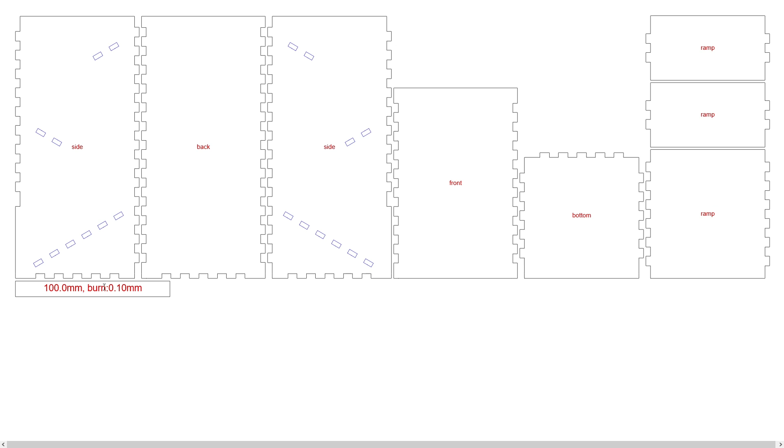Let me just generate this real quickly. That's this down here where it says 100mm burn 0.1. That's just for scale, don't need that. I will want to make a few slight setting changes here.

Let's first turn this off. Up here on the Dice Tower settings, where it says bottom, we don't want that bottom piece. Looking at the picture, it's basically what goes on the very bottom here. Really not needed — this particular deflector will hold everything together down at the bottom, so I think we should be good there. I'm going to go ahead and turn this off so we don't generate that piece.

The other change I want to make is down here for the corners. I don't want it to do a loop. For this particular one, I just want it to be a plain old corner, just a squared off corner. And then the burn correction, I'm going to set to 0.

If I made this a little bit bigger, it will make a tighter fit, and it literally says that here — bigger values for a tighter fit. This will be a little bit loose, but I'm going to glue it together, so I don't have to worry about banging and pounding like I've done with other boxes just to get things to fit together. This should be all I need.

Let's take a quick look at it. The finished product will look something like this. I'm going to do something with it, though — you'll see. Let's generate this.

Okay, get rid of this again. Thought I had that turned off. I do have that turned off. Why is it there? Oh, I turned the wrong one off.

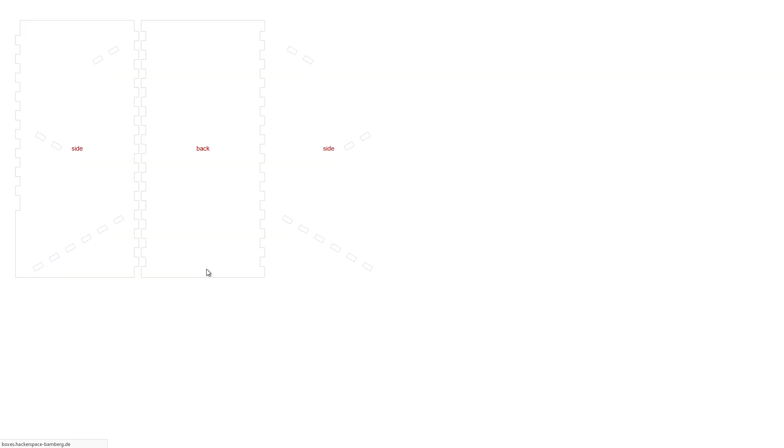Now let's take a look at it. That's what we want. So we've got the two different sides, we've got the back, we've got the front, and then we have the ramps or the deflectors. That's all we need, that's good.

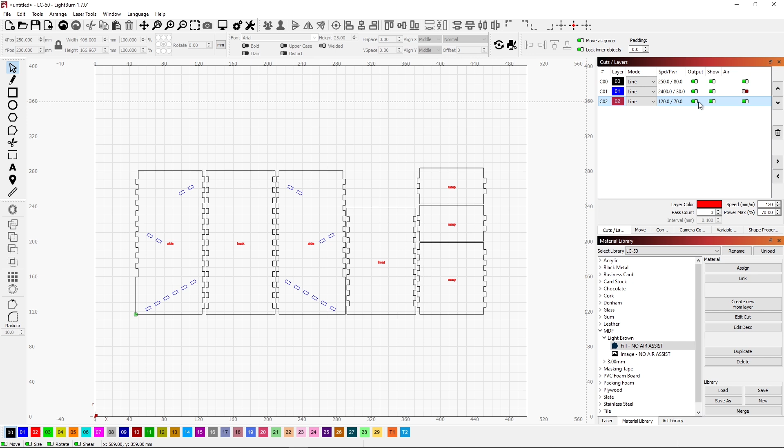I'll go ahead and download this, and then we can open it up in LightBurn. In LightBurn, this is how it opens up. Let's just change a couple things real quickly. I want to turn everything to line for now. We will not be outputting the name, so I'll go ahead and shut that off now so I don't forget. But this is basically what it's going to look like.

I have some graphics that I want to put on here, and to get everything to line up the way I want, I need to move these pieces around. The sides can be where they are, sort of, except they're kind of backwards. So I need to move some stuff around.

I'll go ahead and select this. I'll move it up out of the way for now, doesn't matter where. Grab these two pieces. Grab this piece — bear with me while I move some stuff around.

A new feature within LightBurn is to actually show what type of selection you're doing. In LightBurn, when you select from the left to the right, you'll notice we have a red square, and the only things that get selected are objects that are 100% inside of that rectangle. So if I select this, I should only get one thing selected. And it didn't even get that. Was it not in my rectangle?

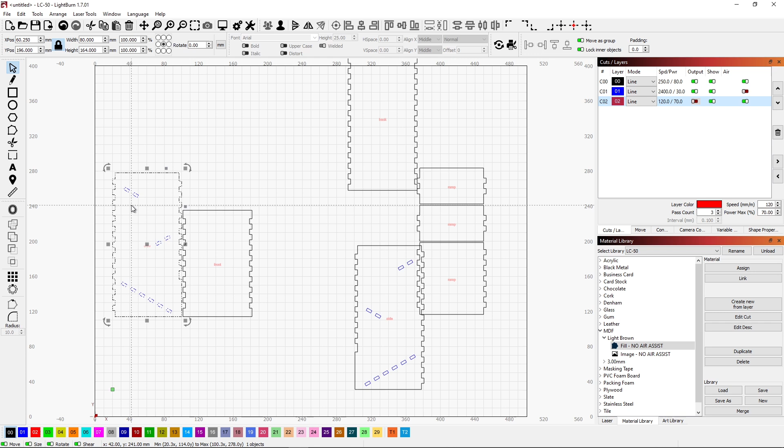No, it wasn't, because this whole object is grouped together. So the whole object wasn't in my rectangle, therefore it doesn't get selected. But if I come down like this, I'll get just this side. When you select from the right to the left, you'll notice the box is green, and this will select any object that's partially in your selection area. So that's just something to keep in mind, and it's a new visual so you can see what you're doing, which way you're selecting.

That's a new feature. I believe that came in 1.7, so relatively new.

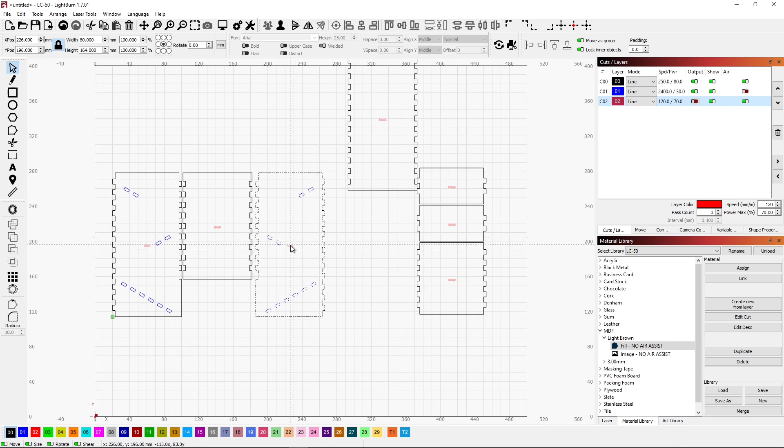I also want to have this piece. This is the front piece. I want it aligned with the top, for reasons I will get to. We'll get that aligned to the top, and then we have our other side. So let's grab that. We'll want that over here. We'll want to align that to the top of this whole thing as well. And then the back - doesn't really matter, I guess, but we'll just get that aligned. Have everything aligned on the top, so everything is all set there.

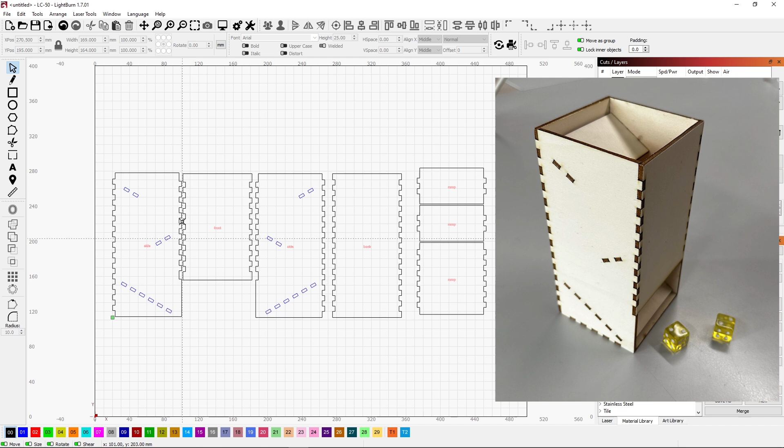What I want to do is I want to put an image. I want to put an image of a face or a dragon on here. And the reason for that, this is the mouth where the dice come out. You drop it in the top, and it'll go through this side deflector, then this one, and then the big one, which is here, or they call them in a ramp, and then they'll roll out. What I want to do is have a picture of a dragon where the mouth is this opening.

Let me grab that image. Let's go to the art library and bring that up. So we go into our dragons. Yeah, let's see, where is it? Here it is. We've used this dragon before. Bring it on here - a little bit big. To be able to see everything properly, I'm going to put that up at the top of my list. Everything else is on top of it. So I'll want to size this down just a little bit so that it fits the way I want.

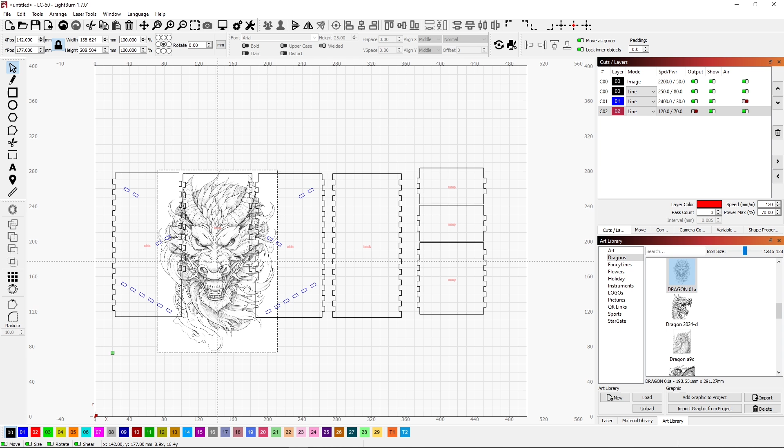So basically I want the mouth kind of like that. So the mouth ends right here at the end of this front piece. And then this part of the mouth won't get printed. But I do want to print the rest of that mouth, and I want to print it on this ramp that'll be inside of here. So when you look straight onto this, you'll kind of see the whole dragon. You'll see this part of the face, and then if you look in, we'll see some of this. It'll be slanted back, a little askew, but it'll still look kind of cool.

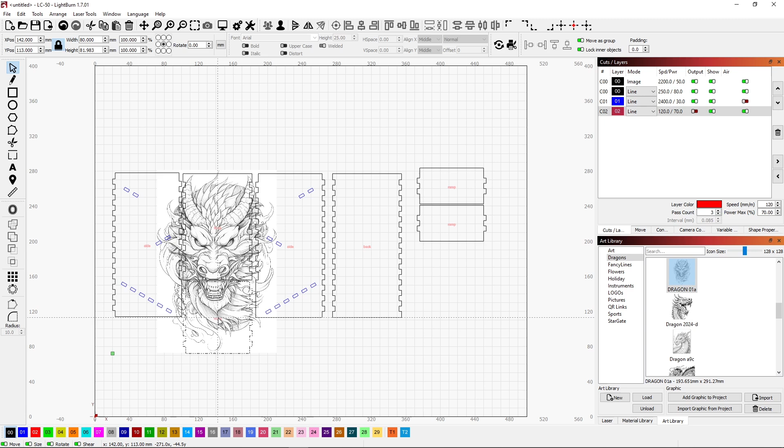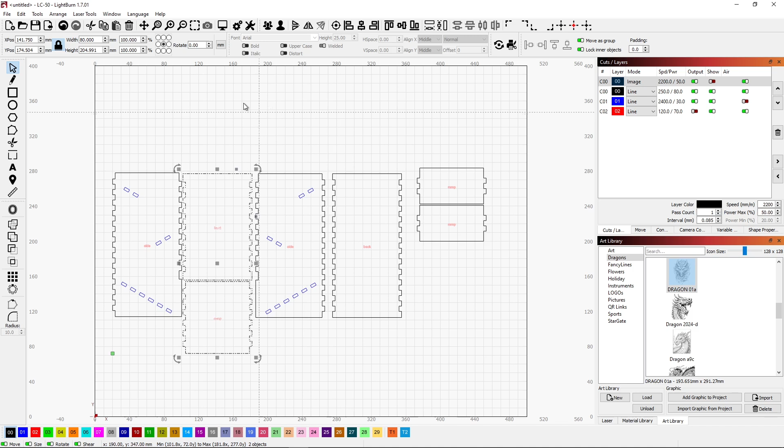So we'll want to bring this piece over here, and we'll zoom in on that so we can see that a little bit better. Let's get that to align properly. Hold on a second. Let's just not show the dragon for a second. So I want this to align on the right side of that. Okay, got it pretty close. We zoom in here. I also want to move this up so it's nice and tight.

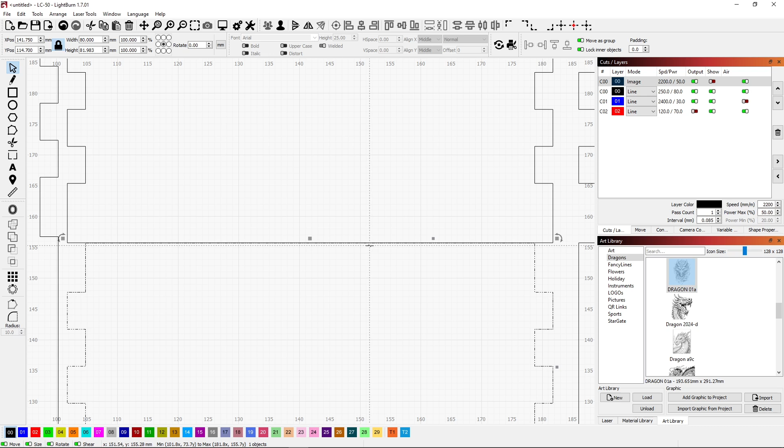If I do nothing, it moves, I believe, 5 millimeters at a time. If I hold control, it moves 1 millimeter. And if I hold the control and the shift, then it moves small amounts. I want those two basically butted up against each other. It doesn't need to be exact.

So the intent is going to be something like this. This is going to take a lot of extra space that I don't want, so I'm going to lose this area down here and this area down here. So what I'm going to do is I'm going to select my image, right-click it, and say duplicate.

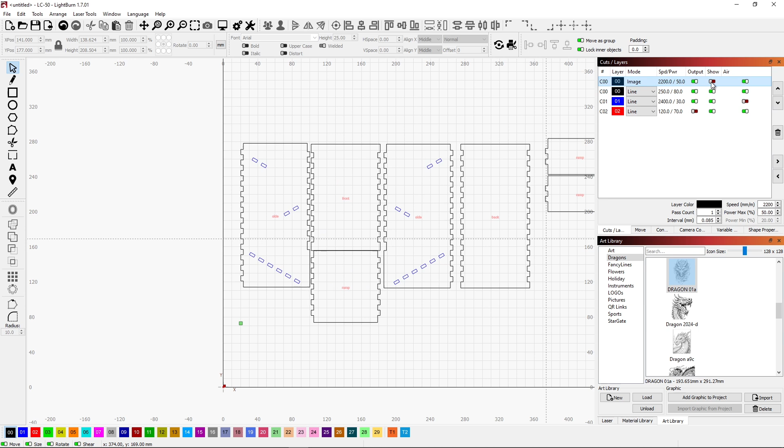All right, let's see if we can select. I got to turn that image off real quickly here. I want to select this piece. Turn my image back on. I'm going to hold the control key, hit select, so I have both of those. And I'm going to go ahead and just quickly group those together and move them off to the side for now. I'll get back to those later.

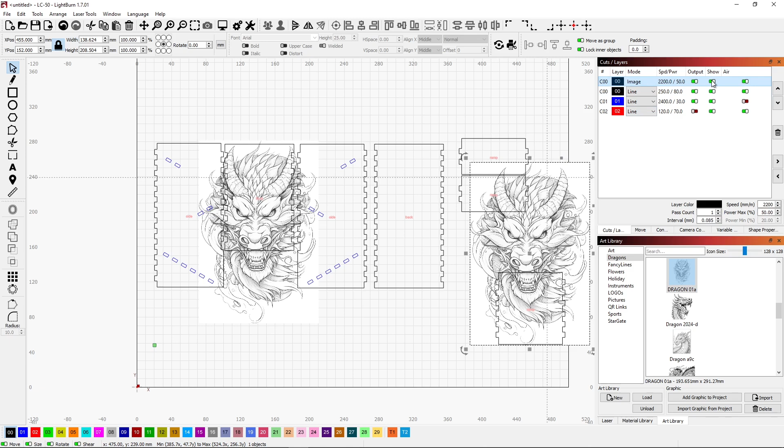Actually, I can go ahead and do them now. What I want to do is take this piece, and I have to ungroup it for what I want to do. I'm also going to have to ungroup this. I don't need the word ramp - it won't do what I need it to. Put that on. So we'll select the image. Turn that off real quickly. Do a control select here. Turn this back on.

I can right click and use apply mask. What will happen is only the part of that image behind my front ramp will be burned. That way I don't have to burn all this extra stuff, I can get just this part of the mouth. Okay, that looks really good.

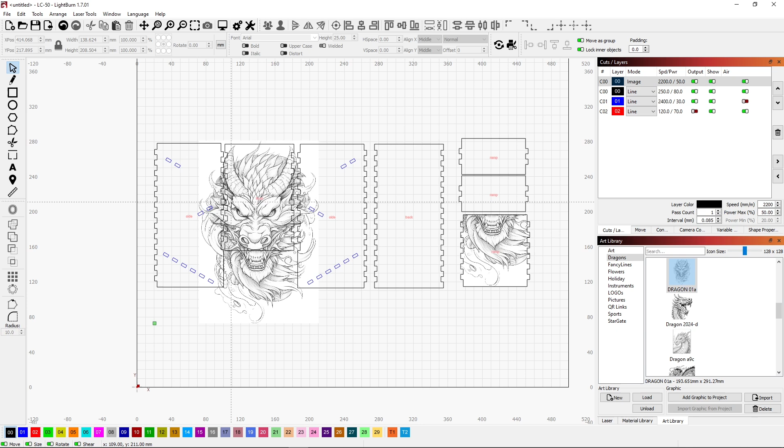Let's go ahead and get those name back on there and group this together. We'll get all this arranged properly later, I'm just going to set it there for now. Over here, if we zoom in just a little bit.

I want the dragon on the front piece. I thought it'd be really cool to have it wrap around the sides as well. What I'm going to need to do is change the gap so that there is essentially no gap.

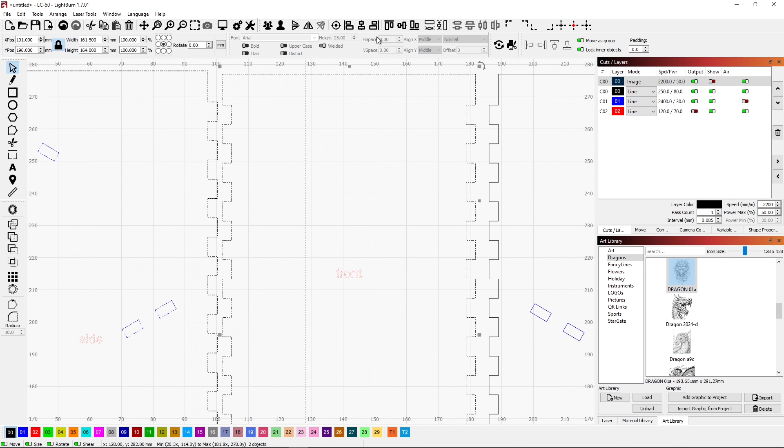If I zoom in here, let's turn this off. For some reason, why are you so much higher? I thought I aligned these already. Let's get those aligned on the top. There we go. And then we can go ahead and move this over. Boom, lined up, super nice.

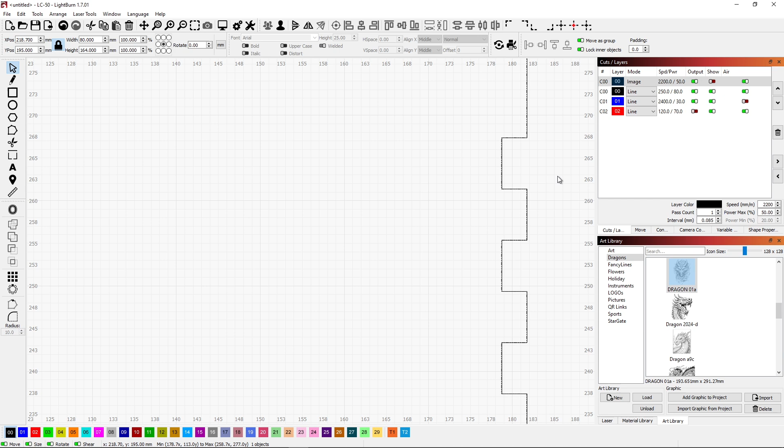And then we'll do the same thing over here. We'll get this piece and slide it over until it's right about on top of that. Doesn't need to be exact. This should work for now.

Okay, this piece, we could do the same thing. Why not? We'll see how that saves us a little bit of burning time. That moved over, okay, we can turn our image back on.

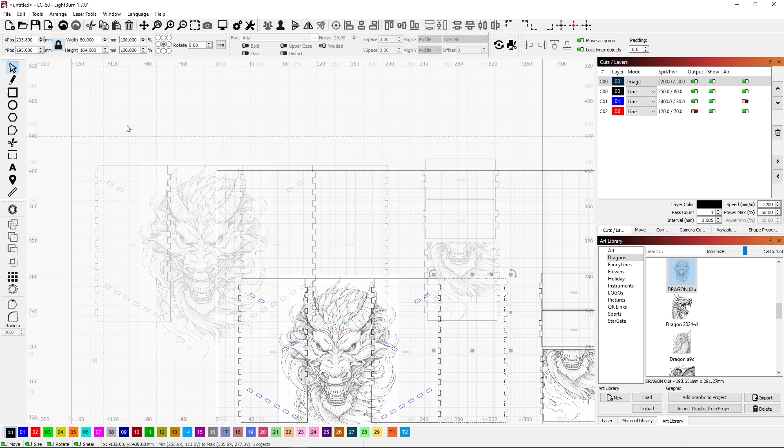So now we have these pieces all butted up against each other. The reason I did that is I can have the laser come down and burn this as one thing instead of having to burn it twice, so it'll save some time. We'll wait until later when I show you how I optimize this, how that's going to work.

These pieces, we'll wait a second on those. I'm still looking at this image. When we burn it, it's going to burn the whole thing, and we really don't need to burn all of this that's down here because there's no wood there that we're going to need, and that's going to be wasted time.

But what I want to do is a mask. Unfortunately, I cannot select multiple items to be the mask, it has to be one thing. So I'm going to make a new mask.

I'm going to make a rectangle, and I'll have that rectangle start on this line and come down to be on top of that line. I'm going to put it on a construction layer. It doesn't really matter how wide it is for our mask. That'll get rid of the stuff down here on the bottom and the little tiny bit sticking above the top. The other thing I want to do is get rid of this part out here.

So I need to add another rectangle. Make sure we're still selected here. We'll zoom in so we can see this. When I get close to that corner, I'll click there, and when I come down to this corner, I'll let go. And we can turn everything else off so we can see our mask and our image.

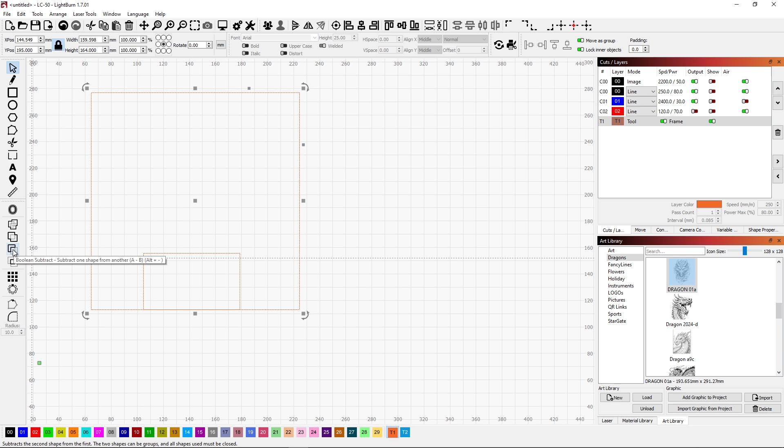Did I not get it selected? Hang on. All right, so what I want to do is select this main thing, Shift Select the small rectangle, and then subtract it. Now we have this shape.

If I turn on my image again, this will work well as a mask. If I pick my image, Shift Select my mask area, and then apply that — okay, now we can see it's not doing any of the mouth, anything outside of that. This will save us a ton of time when we're doing the burn.

Go ahead and just turn everything back on so we can see what's going on here. So this all looks good, that should do exactly what we need. This is basically what we want to burn.

Let's do some optimizing on this. For the image, we go to our material under MDF, burn, fill, image, and we want to assign that to our image. Then to our exterior borders, we want our 3mm cut through, we'll assign that. The blue is also going to be a cut through, and just to make sure that happens first, I'm going to move it up — doesn't need to be quite that high.

First thing we'll do is the images. Then we'll do the blue, which is the interior cuts. Then the last thing that we do will be the black lines, which is our exterior profiles of all the pieces. Now let's do a quick preview.

All right, it's saying 1 hour and 49 minutes to burn everything. We can improve on this greatly. So that's basically, we'll call it an hour and 50 minutes.

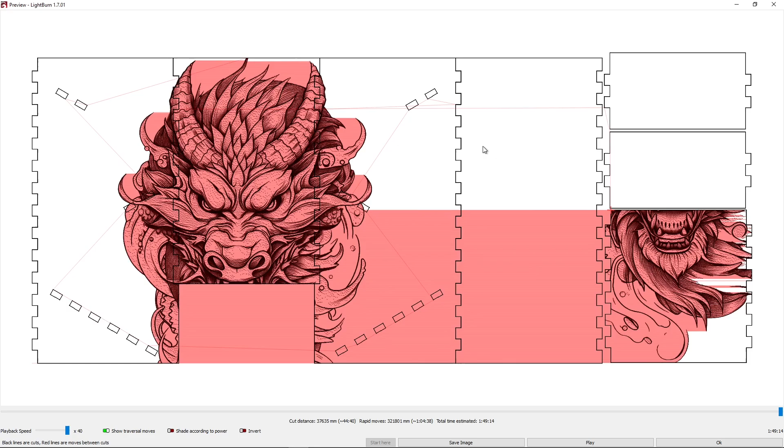Let's make some changes. The first thing I want to do is fix how it's burning or etching our image. It's basically scanning left and right, using 0 degrees. If I change this to 90, that's one change.

I'll also make sure that we're doing individual shapes so that we're not jumping back and forth between two shapes. What this will do is scan vertically, and since there's nothing to burn down here, it'll skip this area. Let's take a quick look at the preview and see what our savings is.

We were at 149, now we're at 132. So that's a savings of 17 minutes, just by changing the direction that it burns these images. That's a huge savings right there.

But there's more that we can save. So now we're at basically just over an hour and a half.

One thing that we can do is come into our option settings for optimizing. Down at the bottom of the list, we have an option called Remove Overlapping Lines. Remember, we put these pieces very close together so that these finger joints were essentially in the same spot. By turning this on, instead of burning these fingers for each piece, it'll only burn it once.

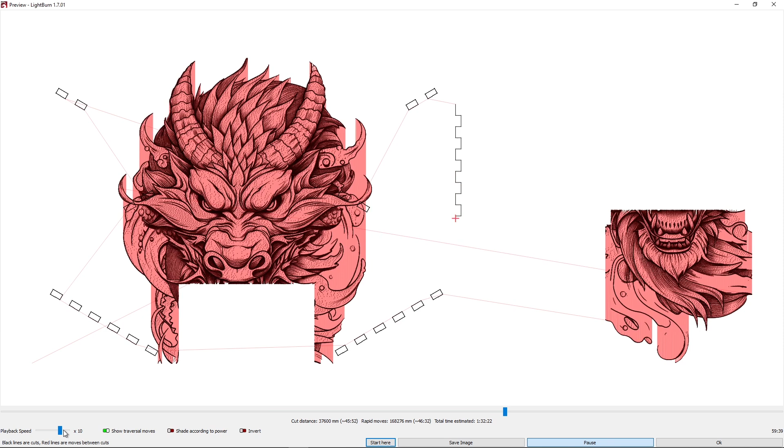Before we do that, let's take a look at how it currently burns that in our preview. Let's speed this up a little bit as we go. We see it's burning this shape, doing the external edge, and it's going to do it three times.

There's the second time around, and it's doing the entire part. Number 3 — when it does this next part, you'll notice it goes up the side and then comes down the middle. It's not supposed to do that.

Oh no, it is supposed to do that because we haven't turned this on yet. So it's burning in the middle here, burning all of this again. We don't need to burn that again, so that's wasted time. It's going to come over here, come down, come over here, and do these fingers again. Those are already burned because we butted those pieces up to each other.

When we come into our optimization settings and turn Remove Overlapping Lines on, we can set how far away they are to be considered overlapping. I'll use the default. Let's go back into our preview and see what it says.

So we've gone from 1:32 to 1:27 — 5 more minutes that we've taken off. So that's 22 minutes that we're saving so far.

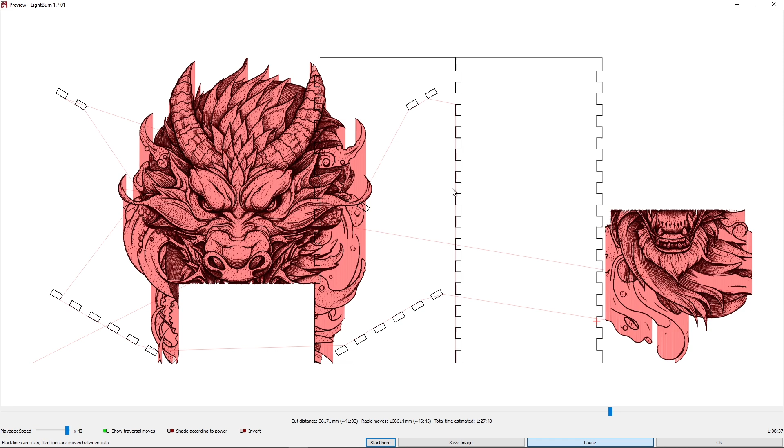We can see that when it burns — let's back our timeline up here — it's doing the outside edge. That's one pass. We're on the second pass, third pass. Now when it's doing this, it goes and it stops and it comes back, so it doesn't repeat the burning here. That's where we're getting our savings. So we've saved ourselves 22 minutes on this.

We're about at an hour and a half for burning this whole thing. This looks really good. What I do want to do is add a few more graphics on here — I want to put some images on the back, and I'll put some little images on the side. I won't bore you with that, let's go ahead, I'll do that. Well, let's look and see how this burns on the laser.

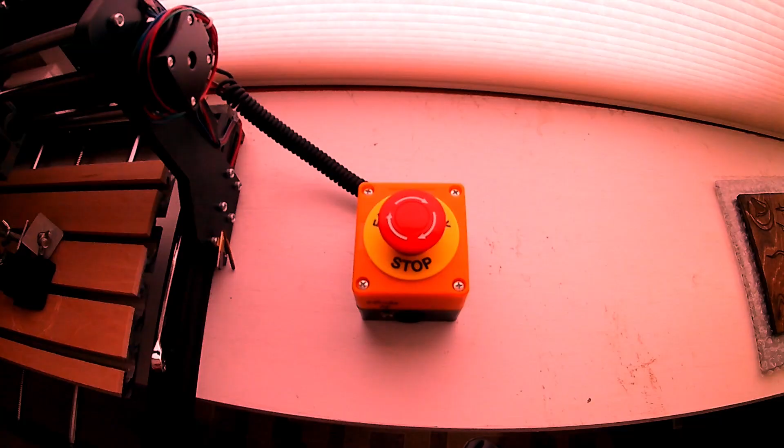Oops. So it looks like we can just take handfuls of dice and run them through here if we wanted to. Just get a whole bunch. I'm going to turn it just a little bit so they're not coming off the side of my desk.